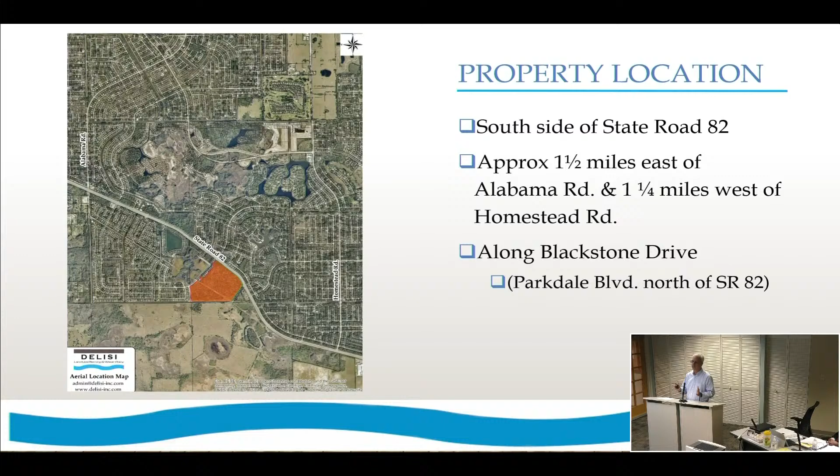The property is located on the south side of State Road 82, approximately 1.5 miles east of Alabama Road, which runs up north into Lehigh Acres, and 1.25 miles west of Homestead, which you'll see right here, which also runs north into Lehigh Acres. You can see Lehigh Acres dips south of State Road 82 in this location, and all of this, as with most of Lehigh Acres, was at one point in the urban community land use category as part of that whole area of Lehigh Acres.

On the north side, there is residential, and you can see the RM2 zoning, C1A zoning. There's commercial on the east side. Again, residential on the west, and this is a LAMSID restoration area right on the west. To the south of the property is density reduction groundwater resource area, and this is vacant land owned by Lee County. Not sure what the utilization is.

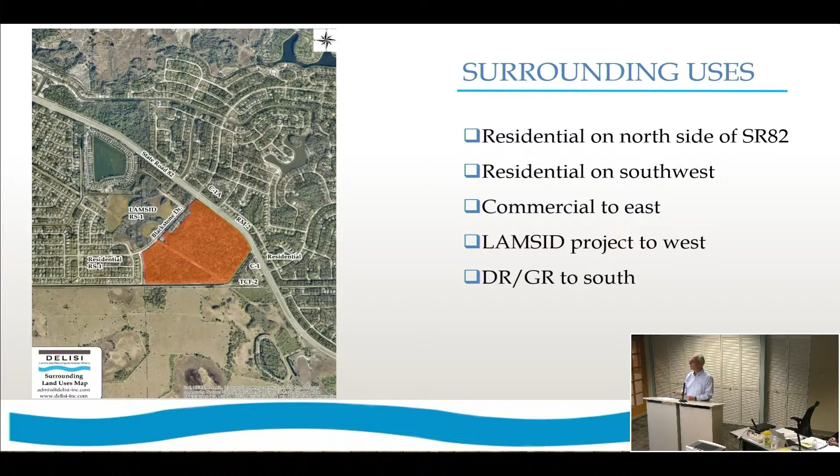The property is currently zoned mixed-use plan development. So we've approached this as an amendment to the plan development, but we're doing two things specifically: we're taking in this parcel that was left out at the corner of Blackstone and State Road 82, and we're changing up the mix of uses.

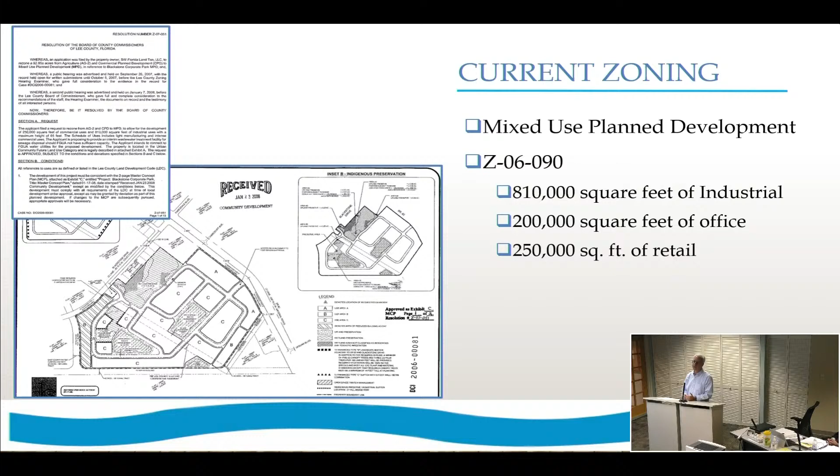The zoning DCI2006-00081 permitted 810,000 square feet of industrial, 200,000 square feet of office, and 250,000 square feet of retail. So there was a pretty significant commercial component anyways, but it was definitely more heavily focused on industrial. We're proposing to change up that mix of uses and make it more retail and less industrial.

So the proposed amendment is to add this 5-acre property here and change the request to 500,000 square feet of commercial, retail, or office, and 250,000 square feet of industrial uses. The idea is the power line is really the separation. This is an FPL power easement. To the south of that is the industrial area, to the north is the commercial area.

Property has two access points. One is directly to State Road 82. The other is to Blackstone Drive on the west.

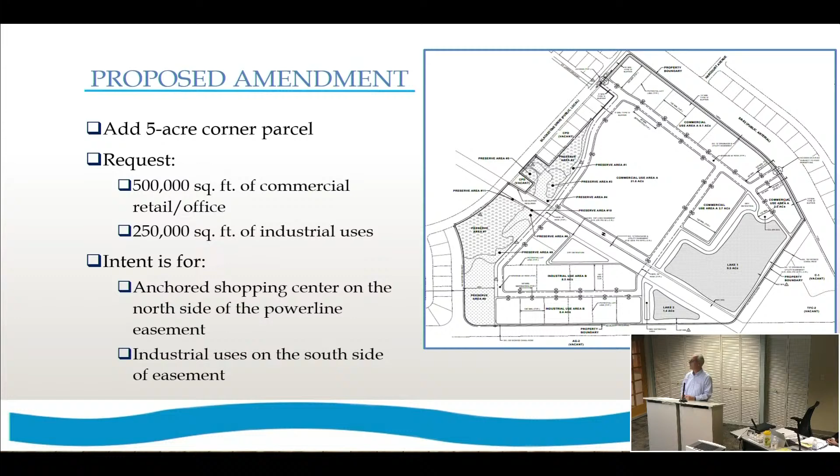You'll see on the master concept plan, we've located all the common water management areas, the lakes, in these locations, and also dry detention areas for pretreatment. The indigenous area is over here on the west. That was purposefully located, both because that's where the wetlands are located, but also it acts as a nice buffer area to the residential uses, which are to the west, and I'll talk a little bit more about that later.

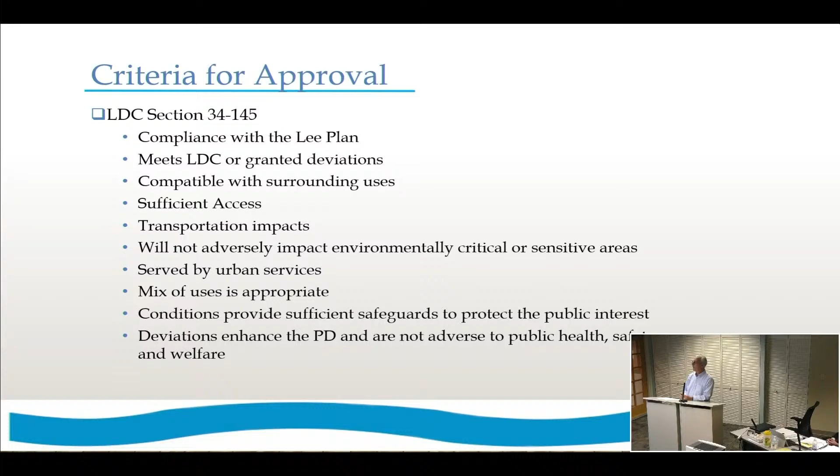So the criteria of approval is found in LDC section 34-145. I'll just run through that quickly. We meet all these criteria. We are consistent with the comprehensive plan. We're located in the industrial future land use category here, and as I said before, urban community is all around us. You see this big wetland area on the future land use map.

I'll start with the wetland and just say that doesn't correspond to the actual wetland lines, and the wetland land use category, as you know, really defers to South Florida Water Management District jurisdictional determination. So that line moves as our wetland permitting demonstrates where the line is.

This small portion of the property is in the urban community land use category, and the history of this is the entire property was in the urban community land use category. Subsequent to the initial zoning of the property as predominantly industrial, there was a county-initiated comprehensive plan amendment that changed the property to industrial. I think that was probably done just because that's what the zoning said it was, and the county wanted to locate more industrial areas on the future land use map.

Now, the industrial future land use category allows for 20% of the area of industrial within each planning community to be utilized for commercial uses. So when we started this zoning amendment, we weren't sure if we actually needed a comp plan amendment to do it. We met with planning staff, worked with Brandon Dunn and Rick Burris to look at what was going on in the Lehigh Acres community and if we actually could do it without doing a plan amendment. They came to the conclusion, as did I, that we meet the 20%. We're well under that currently, so with the addition of this commercial area, we are consistent with that future land use category.

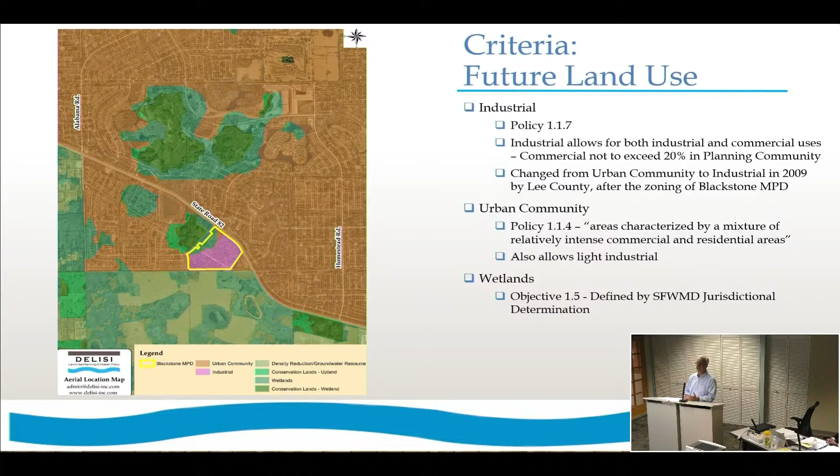This property is partially in the Lehigh Acres commercial overlay because they touched this little area, since that area was still zoned commercial. But the point of the overlay is really to get as much commercial as possible in Lehigh Acres because of the lack of commercial—it's not to exclude commercial. In fact, policy 25.6.2, I believe, the policy after this talks about that. So adding additional commercial to Lehigh Acres certainly implements what they are trying to achieve in the Lehigh Acres plan. We did have a meeting with Lehigh Acres, and it was seen as very favorable. They want more commercial in the area.

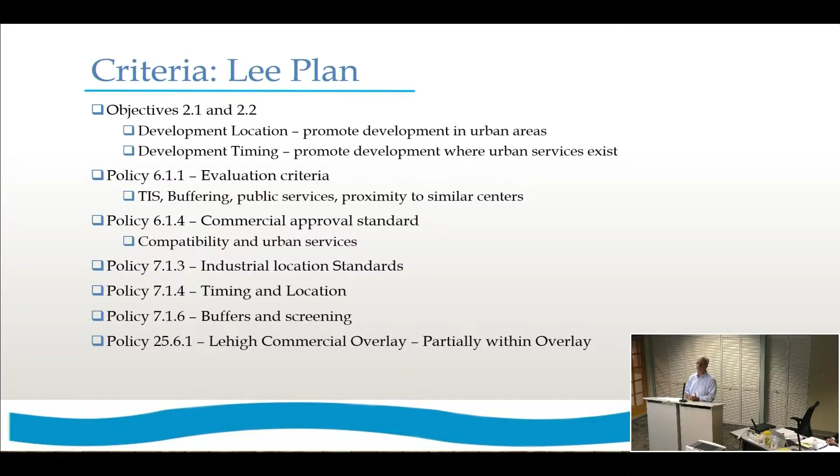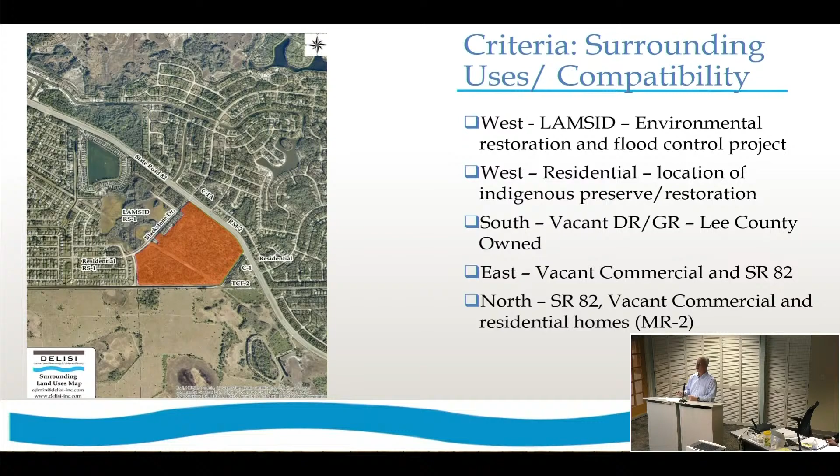Surrounding uses and compatibility—I already went through all of this, and there aren't any compatibility concerns. Again, this area is LAMSID, this is vacant. It's really only this area we have some concern with industrial, but all of our preserve areas are there, so it creates a really nice buffer from those units.

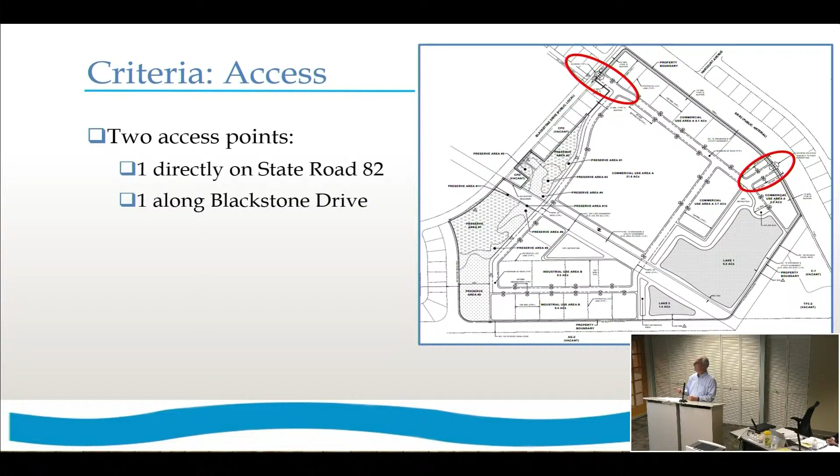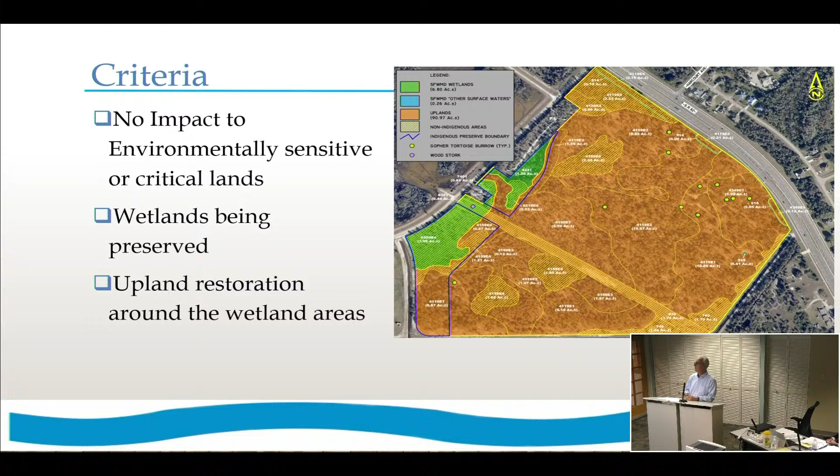Another criteria is access points. Again, our access is directly to Blackstone and State Road 82, which is an arterial road in Lee County. The next criteria is no impact to environmentally critical or sensitive lands. Shane will address this in more detail, but we are not having an impact to environmentally sensitive or critical lands through this zoning.

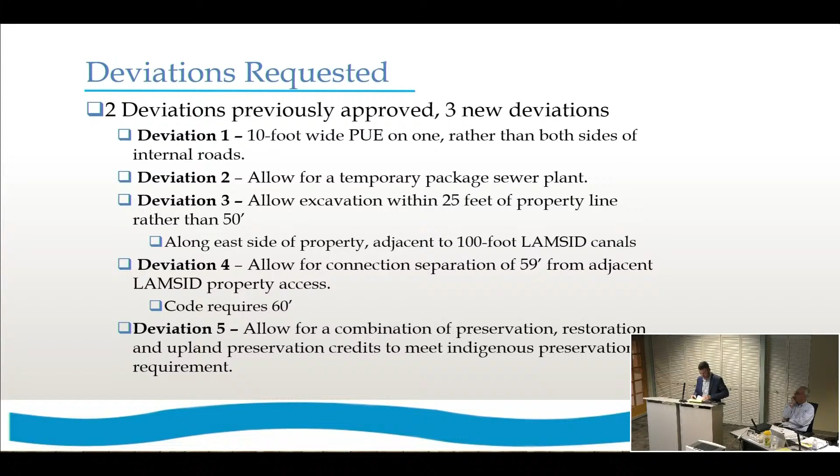This is basically all the environmental information condensed into one slide, so I'll break it down. For any zoning case, we prepare a FLUCCS map for the property, a land use and vegetative cover map. The orange areas represent approximately 91 acres of the property, the majority, primarily pine habitat and pine flatwoods habitat types. There's also some other disturbed land and a power easement running through the property, but primarily pine type habitats.

The green areas are the wetlands, the limits of which were approved in the field by the South Florida Water Management District back in March 2023. Those are fixed, representing about 6.8 acres of the property. You also have surface waters, the blue areas, which are difficult to see because they're small in nature—just ditches along State Road 82, here, here, here, and a small cow pond since there is cattle utilizing the property. Again, those limits of the surface waters were approved by the Water Management District.

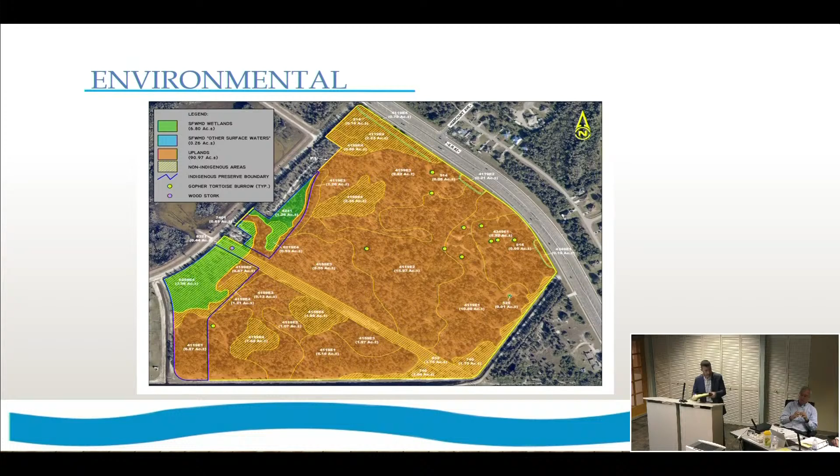Good morning. For the record, Yury Bykau with TR Transportation Consultants. I've been sworn in and previously accepted as an expert in transportation planning, and would like to be accepted as one today as well. Yes, thank you.

We prepared a traffic study for this rezoning application. As part of our traffic study, we first prepared a trip generation comparison analysis between the proposed and existing zoning on the subject property, because I know the hearing examiner always has a question about how it compares in terms of traffic, what's currently approved versus what we're proposing. So we prepared a trip generation analysis consistent with the latest ITE trip generation manual, which is a required source for us to use to come up with traffic projections for projects.

Table 4 here shows the trip generation comparison between the proposed and existing zoning on the subject property. As you can see, during the AM peak hour the trip generation is actually being reduced as part of our rezoning request, and in the PM peak hour it's being increased, as well as the daily traffic. I wanted to make sure you're aware of this. That's mainly because we're increasing the commercial retail component and reducing the industrial component.

As part of our traffic study, we prepared our typical link level of service analysis on all the surrounding roadway network that will be impacted by this project. The results indicated SR82, a recently widened 4-lane divided arterial, will operate at acceptable level of service B both with and without the project in future conditions. Parkdale Boulevard, a collector roadway opposite Blackstone Drive, will operate at a future level of service C without the project and level of service D with the project. Again, these are acceptable level of service standards for these roadways.

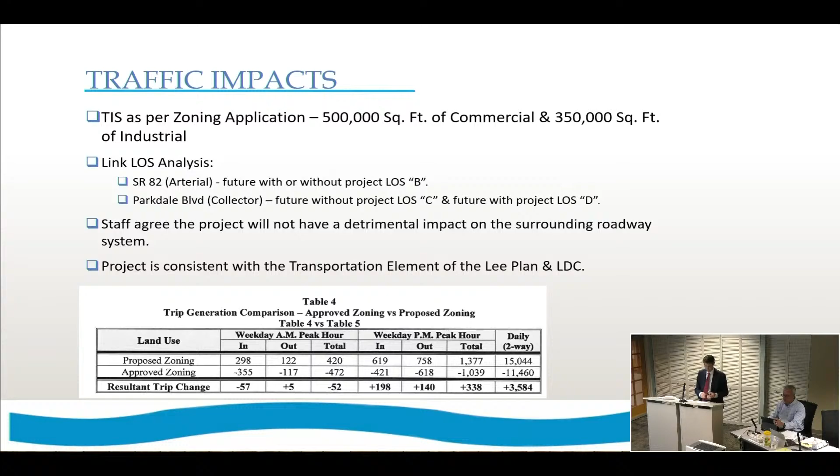We did propose a condition to staff that would provide that, if constructed, the facility would be located in industrial use area B on the master concept plan. For reference, that's here. We can discuss that further after the county does their presentation.

The reason for putting it there was simply because, due to the physical characteristics of the site, the LAMSID Canal here and the preserve over here to the west would provide good natural buffers from a compatibility standpoint if that's where it needed to go.

I would also point out, as Mr. Fitzgerald said, the reason for the request to bring the deviation forward—we understand there is a letter of availability, but Mr. Fitzgerald has had other projects where FGUA did not actually have the ability to provide capacity at the time of development order, delaying it by a significant amount of time, I believe a year or so. So the concern here is that if at the time of development order we run into that issue, we would like the ability to temporarily have an on-site package treatment facility that would allow for service to the project at the time of DO until actual capacity becomes available from FGUA.

We believe that from a zoning standpoint, we certainly understand the need for the discussion about the deviation right now, especially given the things that the hearing examiner raised. However, the review of the specifics of the design of the plant would really be a development order issue, not a zoning issue. So do understand those distinctions.

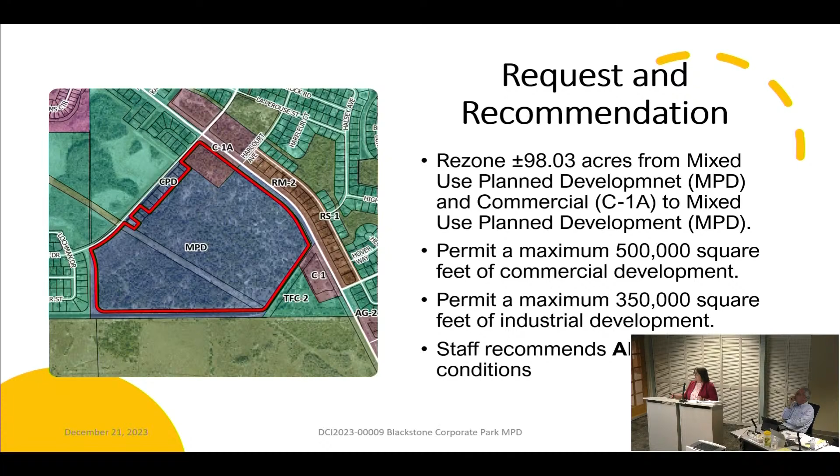Mr. DeLisi went over a lot of the critical points about the case. This is a 98.03 acre rezone to MPD, to permit 500,000 square feet of commercial development and 350,000 square feet of industrial. Staff is recommending approval.

I'm just going to go over a little bit of history. Mr. DeLisi mentioned the 5 acres being added into the MPD as an amendment to this DCI. The MPD currently stands at 93.03 acres. It was previously approved with resolution Z07051.

In that zoning resolution, it was approved for 810,000 square feet of industrial with 250,000 square feet of commercial. As Mr. DeLisi mentioned, the MPD portion did go through a staff-initiated comprehensive plan amendment with ordinance 10-16 to approve industrial future land use category with the wetlands in there as well. The 5 acre piece was not included in that, so that still is in the urban community.

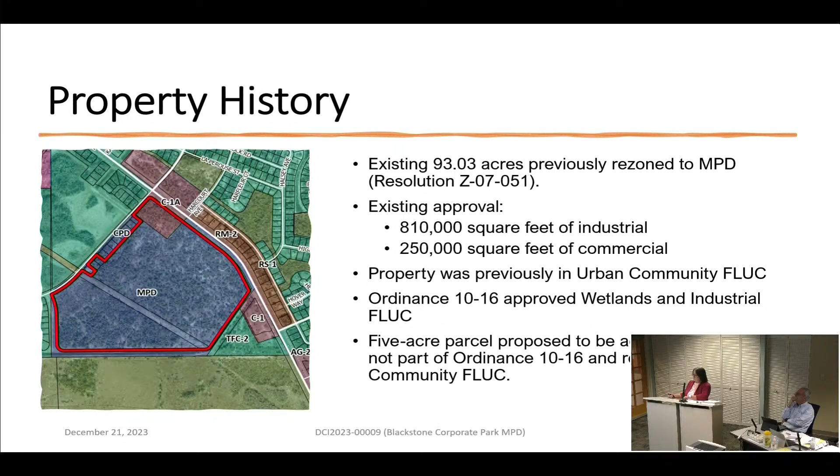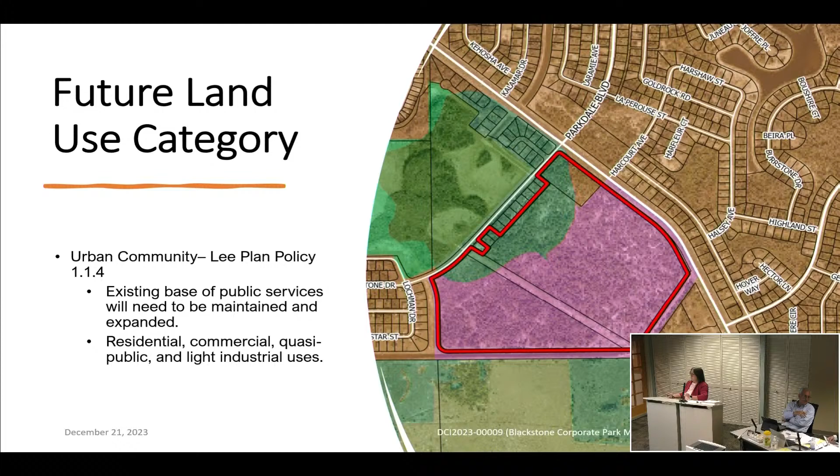As Mr. DeLisi mentioned, future land use category, the project is meeting urban policy 1.1.4 for existing base of public services to be maintained or expanded if need be. The urban community policy is specific to residential, commercial, quasi-public, and light industrial land uses.

The industrial future land use category, Lee Plan Policy 1.1.7, is meant to strengthen the economy in Lee County, to add industrial, manufacturing, research, and offices to support the industrial uses. The location of industrial uses within that future land use category should be close to transportation needs, water, sewer, fire protection. This project has all of that.

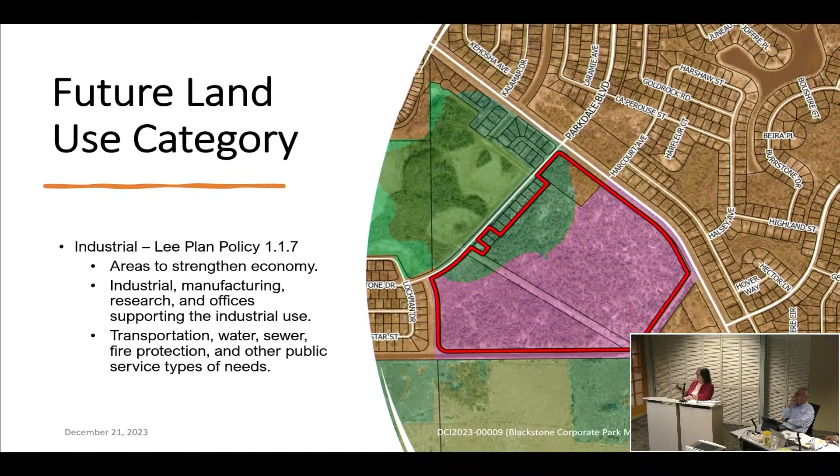The transportation needs, as Yuri went over, State Road 82 is abutting along the northeast, as well as the interstate is close by for the transportation of goods and services coming from the manufacturing area within this industrial segment of the MPD.

The wetlands, the applicant has gone over thoroughly. There are wetlands on site, and it is in the future land use category. They may not be specific to what ground truthing shows, but the South Florida Water Management District permit that the applicant must obtain, as well as a jurisdictional wetland determination, will provide the ground truthing for that. If the design of the site is impacting state wetlands, they will need to submit mitigation for how they're mitigating those impacts, per Lee Plan Policy 124.1.1 and 124.1.2, to demonstrate mitigation at time of development order.

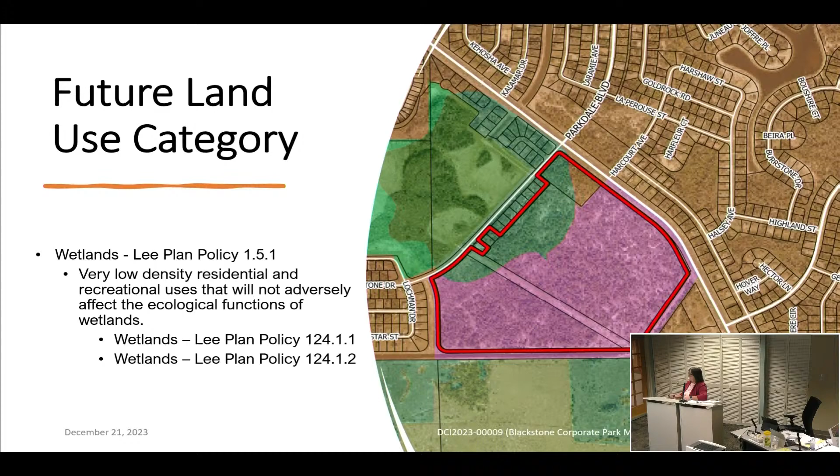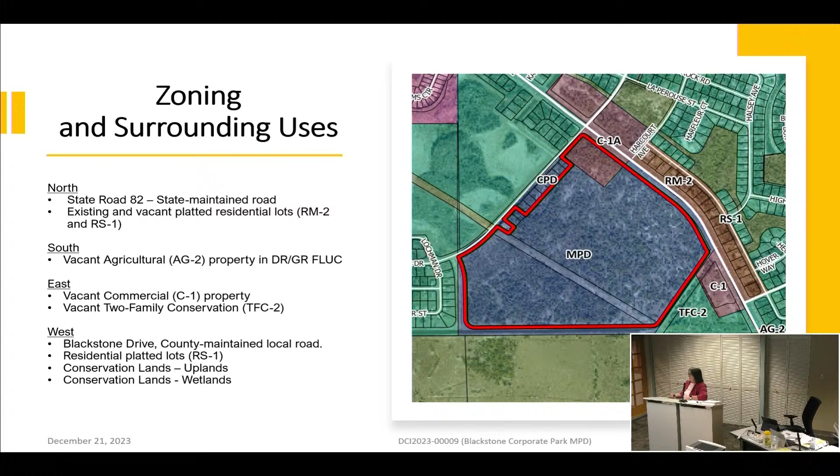Mr. DeLisi went over the surrounding land uses thoroughly, so I'm not going to belabor that. The area of concern really is the residential piece located to the west, and the design of the master concept plan shows almost a 400-foot setback because of the preservation and the Lampstead Canal, until you reach the industrial uses. So there is compatibility there with the restoration and preservation of those areas.

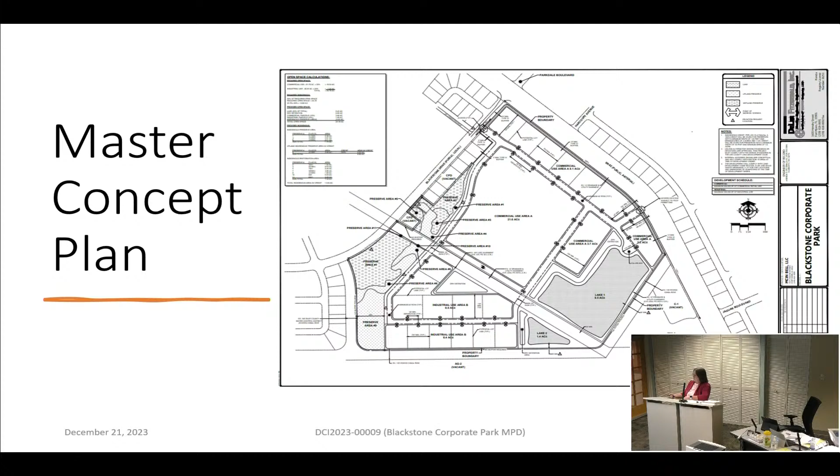To the south is the DRGR, the Density Reduction Groundwater Resource Area, and it is vacant. Then as you work towards the commercial entity, you have a lake on one side, and the preserve kind of snakes up the side along this area, along Blackstone, to give some screening and buffering.

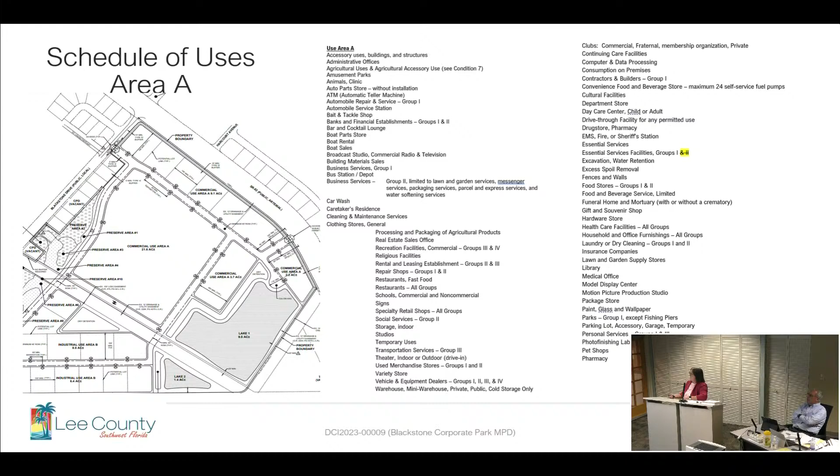The schedule of uses for the commercial area are listed in the staff report, condition D. We have struck essential services facilities group 2, because that is the wastewater treatment plant in the commercial portion, area A. And with this, we have struck group 2 in the industrial segment as well.

Otherwise, the schedule of uses are in compliance with the mixed-use planned development requirements. Mr. DeLisi went through the objectives and policies to support the project for the standards for urban services as well as timing. I want to touch on this because the map shows the sewer force main lines and the potable water lines, the location of those. This is straight out of the FGUA letter.

Every zoning case that staff gets in is required to provide a letter of availability, whether it be Lee County Utilities or FGUA. Those letters are not a guarantee that at time of DO that entity has set aside that threshold so that at time of DO we plug you in. It's showing at this time for the zoning case with what you're proposing, we have availability. That letter states that. That's a standard letter that we get on FGUA. It's stating first come, first serve in that letter as well. That's a standard boilerplate on every Lehigh project that we review, and we have accepted on others.

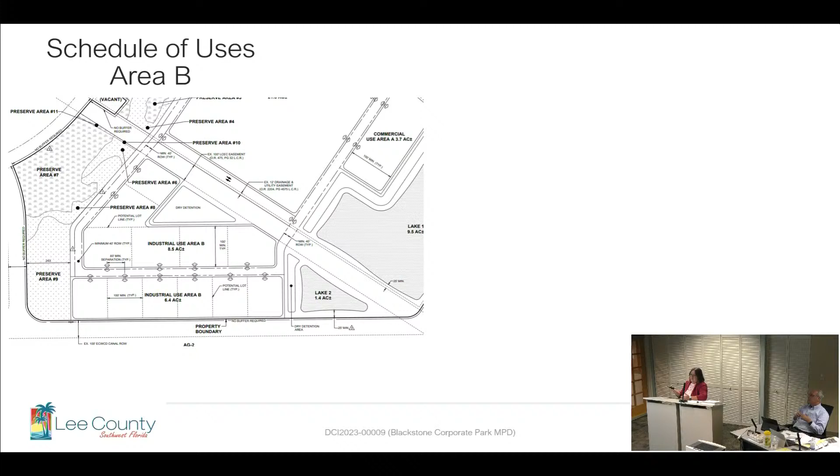Now, I understand that for an applicant, you don't want to come back through zoning, but this condition was written 18 years ago, and we have projects in Lehigh that have services come through the DO process. The one recent one on Meadow Road that has not been able to meet the standards at time of development order is because they're proposing a warehouse with four bathrooms, and they're tripping the threshold to hook up to sewer and water, and the applicant doesn't want to do that. He doesn't want to extend the lines out to hook up. So it's kind of sitting, waiting for him to either make the building smaller to get underneath that threshold or provide plans to hook up. That's on Meadow. That's the only one I went over with the development services manager regarding what we have in-house that's being held up, and that was the one that was mentioned.

So that's really where staff is coming from. If we start to do this on every Lehigh project because there's an issue with the letter of availability, saying we have capacity at this time, it's not a promissory at time of DO, it's going to set a precedence. We want to pull the condition because we have built-in code to address this when you're coming in for a DO. We can address this. We have to meet the Lee plan policy.

And it would allow them an administrative process - basically, if they get through this, they don't get the deviation today, and they move forward. If FGUA at the time of development order is not ready, your testimony is administratively, they could come in and handle that, because they haven't identified it on the master concept plan, they are not increasing intensity of the project because they've already anticipated development on that pad. Because if they do the temporary treatment plant, they're gonna have to put it on an area that right now they've reserved for actual development intensity. Correct. So since they're not doing that, you were saying they don't have to come back through the public hearing process, they would be able to administratively move forward with the DO.

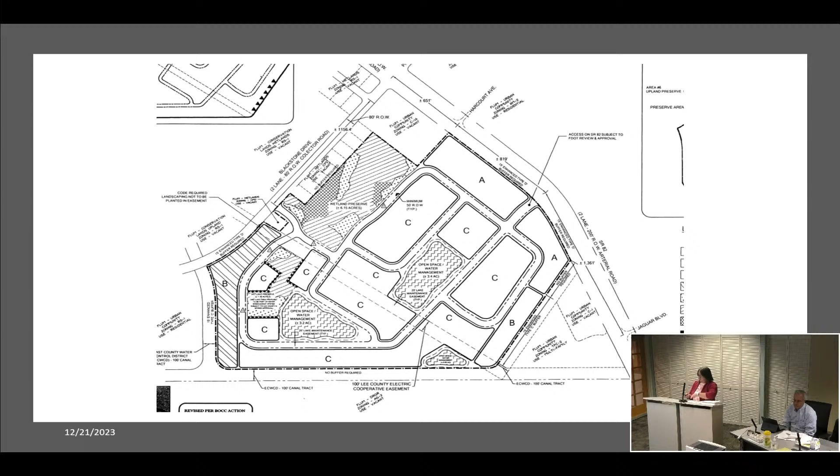And so that's really the point of contention between the applicant and staff. That kind of covers where we're coming from. We don't want to set a precedent where every case that comes in Lehigh, we have the wastewater treatment plant because we're unsure about hookup.

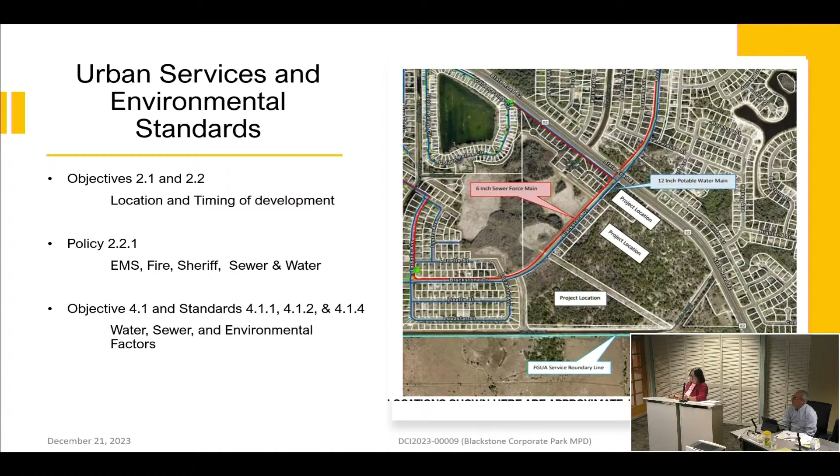Going on commercial land uses, Mr. DeLisi went over these thoroughly with the compatibility issue, the traffic, the access, the buffering. All of this is compliant with the land development code.

Policy 6.1.5, protect traffic carrying capacity. Yuri went over this thoroughly. It is on a state road. The Blackstone is a local road, and at time of development order, that will be reviewed.

Policy 6.1.6, we are in the Lehigh Acres community, and it kind of straddles buffering for Lehigh Acres as well as in Chapter 10. They are meeting those requirements.

Industrial land uses, the applicant is meeting the industrial land use category for policy 7.1.1, employee characteristics, lifting up the economy in the area of Lehigh, which is what they wanted, to provide some goods and services and manufacturing in that area, so you don't have to travel so far for work.

Policy 7.1.2, the compatibility and screening, we went over. Proximity to workforce, it's surrounded by residential, so policy 7.1.3, and then the buffering and screening again in 7.1.6 in the industrial land use category.

Lehigh Acres Community Plan, policy 25.6.1 speaks to the commercial overlay area. That is just in that 5-acre piece that's being added. They do meet the thresholds for that area to go to commercial.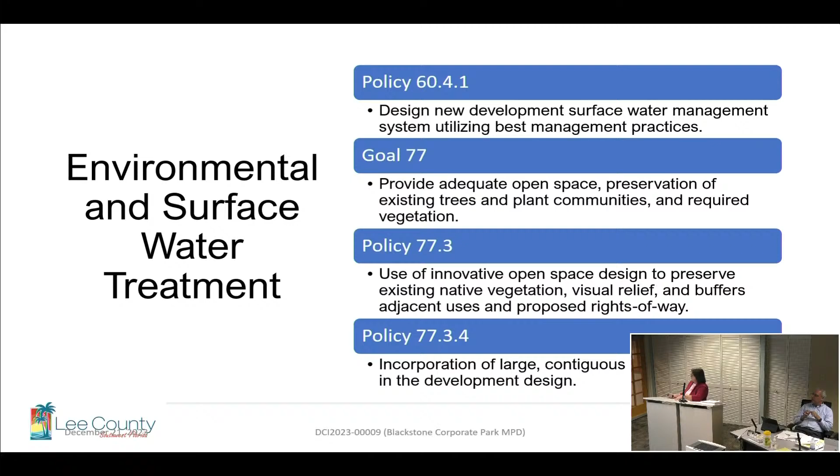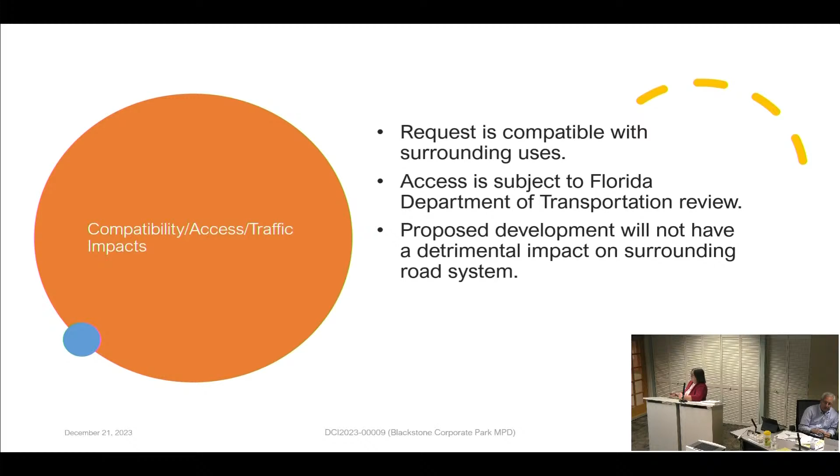Compatibility, access, and traffic. At time of development order, the local road will be assessed if improvements need to be made, if there needs to be any turn lane or anything like that, because it is a local road. State Road 82 will be looked at from the Florida Department of Transportation review, and Lee County staff will piggyback with them on the review during the DO, making sure that our plans are matching what they're proposing as well.

Urban services, we've kind of gone over the FGUA part of it. I wanted to point out that fire, EMS, and sheriff are all within 3 to 4 miles from the subject property. Lee Plan Map 3D for the bike and pedestrian facilities.

82 has been improved, so there is a sidewalk on both sides of 82, and you can kind of see that in the aerial that's on the screen. So adequate urban services are being provided and are accessible for the applicant to provide stub outs to hook into the potable water and sanitary sewer.

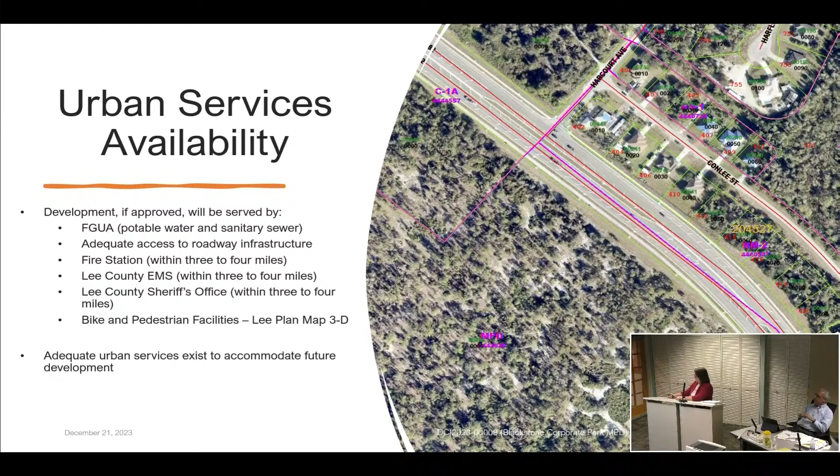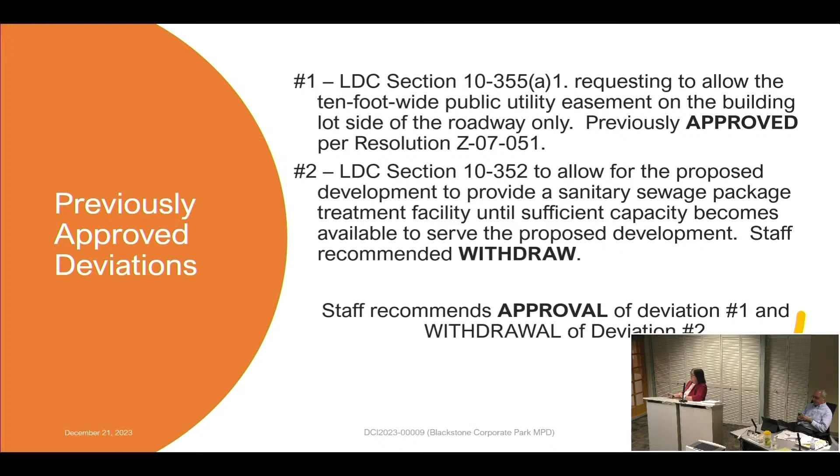The applicant has gone over the deviations thoroughly. Staff is carrying over the previous deviation 1. We are recommending to withdraw deviation 2. The new deviations...

provide a 25-foot setback for the excavation from private property. There will be a buffer in there, and littoral plants around those lakes, so there will be protective measures. The adjacent properties are vacant DRGR land to the south, as well as vacant TFC2 and other commercial to the east. So there will be protection measures on those properties when they come in as well for their buffering.

The separation to go from 60 to 59 feet for the driveway separation, that is a LAMSID service like they went over. Public health and safety for a 1 foot separation, it should be okay in there. And the utilities on the one side of the road makes sense because of the preserve. Mr. Fitzgerald went over that.

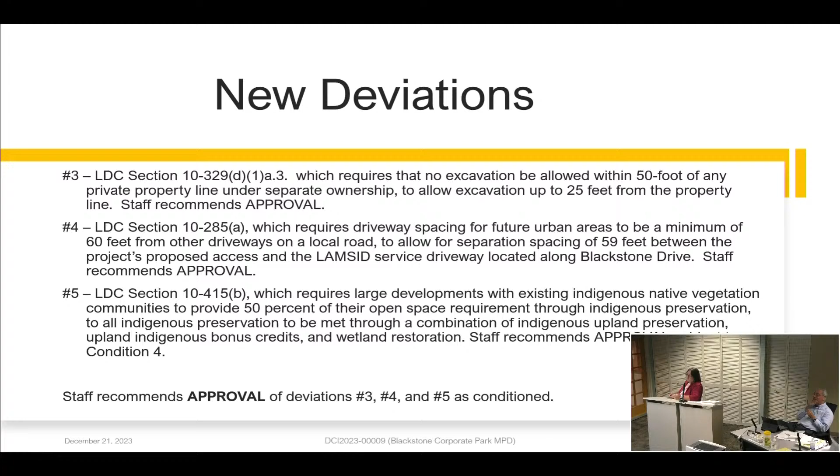That made sense. And then the 10415B, that just talks about the indigenous open space and how the wetland and upland restoration with the bonus credits allow the wetland restoration to receive the bump up of the bonus. And those are the locations of the deviations. With that, the findings and conclusions, staff finds it consistent with the Lee Plan Land Development Code and recommends approval as conditioned. I'm here for any questions if we have any further.

Well, the one issue remains, right, is deviation 2. So just so I'm understanding, from staff's perspective, when they come in for their DO, they have to still be consistent with the Lee Plan. So if the Lee Plan requires them to connect, that safety valve is already in place. So even if the deviation were granted today, if it's conditioned that there is connection or service available, they have to do that. They wouldn't be able to just have carte blanche availability to come in at time of DO and just say FGUA is available, but we want to do this anyway, because there would be a backstop, I guess, is what I want to be sure.

Correct, because in that land development code section, you have to provide a letter from the entity saying there is availability. We haven't received anything on that in the 48-hour letter. We're just unsure. There's no written documentation saying FGUA, well, with what you're doing out here, we do not have capacity, so you're going to have to find a different means. We don't have that, and that's what that code requires. In order for you to get that deviation, you need to have documentation that there's no availability. We don't have that at this time.

And again, that's why this is usually a DO issue, right? Because that specific finding, it's not ripe yet, because as you said, it's first come, first served, and they haven't gotten in line yet because they don't have a DO application pending. But going back to 4.1.2, the language I was caught up with is it requires them to connect. It's must language, right? So they've got to connect if it's there. And then it says if the utility has sufficient capacity to provide it, then the development must connect to it if there is existing infrastructure adequate to accept it.

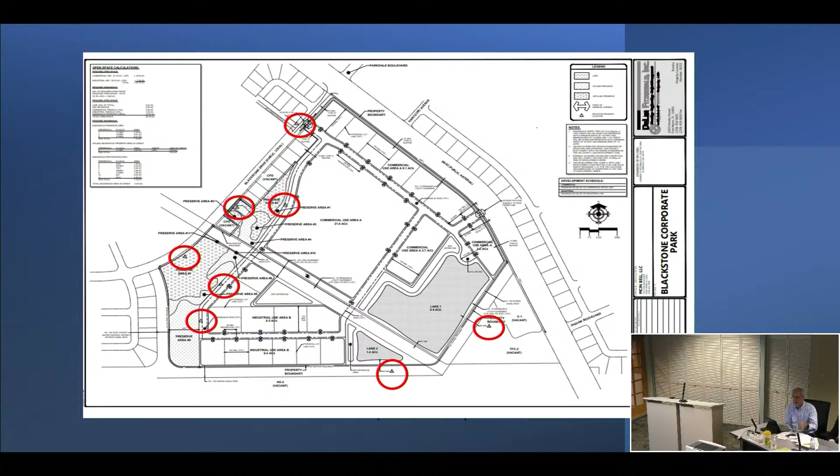I do have the section of code for you. It's in section 10-352, potable water systems—under private systems, B. Actually, 10-353, sanitary. It says in subsection B, individual sewage disposal systems: the system approved under subsection B1 of this section must be removed or abated, and connection to the utility must be made not more than 90 days from the date the utility provides written notice to the property owner that sanitary sewer service is available at the boundary of the development and connection is mandatory. An appropriate bond or equivalent security may, at the utility's option, be tendered. Thank you, I had that printed but couldn't locate it without my glasses—thank you for the assistance. I have that now.

Did staff have any other final comments for the record? No, ma'am. Okay, thank you.